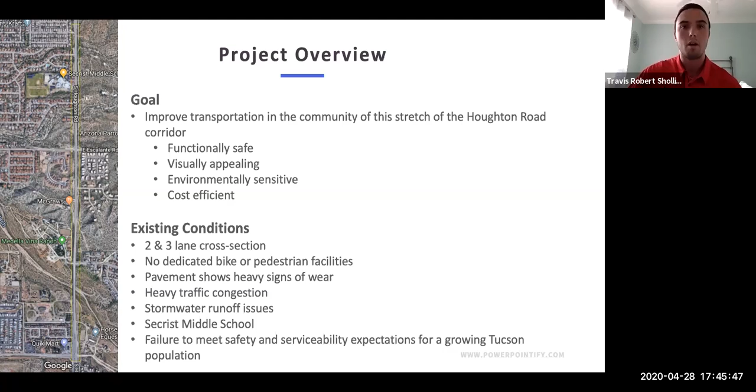So what are we doing about it? Our design team is confident that our design solution checks all your boxes and can be defined by this simple scope of work. We want to expand the 6-lane highway with a center median and paved shoulders. We want to improve the horizontal and vertical geometry, as well as the intersection realignments and right-of-way expansions.

We're going to implement traffic control throughout all phases of construction. We want to provide bicycle and pedestrian facilities, including an ADA accessible pathway. We've designed 2 new bridge structures to accommodate the expansion. We want to add additional drainage components as well as improve upon the existing ones.

And like mentioned earlier, perhaps the greatest concern is improving the safety, access, and student drop-off and parking at Secrist Middle School. All the while, our design is backed by several aspects of value engineering that apply to the components listed below: the retaining walls, sustainability, Envision design, and the bridge design selection, which will be touched upon by the respective disciplines later. Without further ado, I'm going to hand it on over to Sergio, our roadway lead.

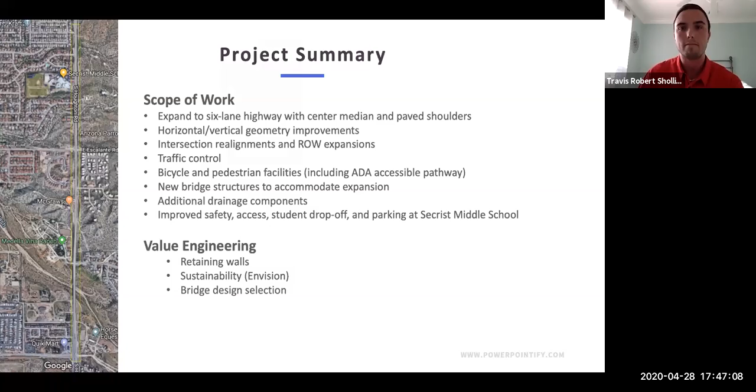Thanks, Travis. As Travis mentioned, there's only 2 to 4 travel lanes, which can get pretty congested during peak hours. And currently there is no sidewalk or bike lane, which makes driving the only method of navigating through Houghton Road safely. So I decided to go with a design from the roadway design manual. I picked this design because it provides 6 travel lanes, as well as a curbed median, sidewalk, and shoulder that can be used as a bike lane.

I also picked this one because it's familiar to the public, because this is a similar design south of the project area, and I felt it would be best to keep everything consistent. Some sections will require retaining walls because some of the end slopes extend past the right-of-way easement, as well as may interfere with the utility easements. Next slide.

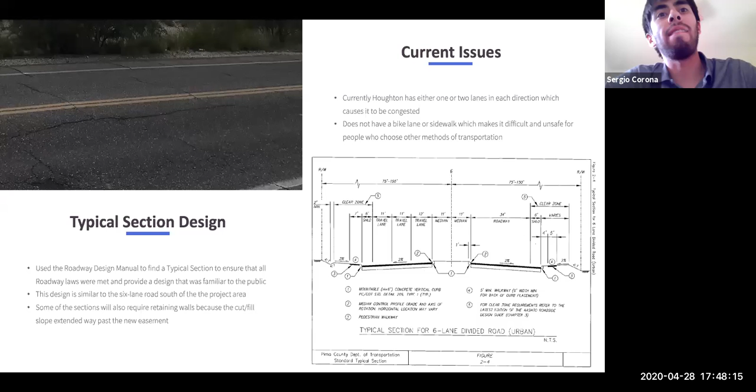Another part of the project was designing the intersection for Escalante, and I decided to follow a similar design as the roadway design manual. Instead, I decided to go with 4 travel lanes because the traffic flow wasn't as intense as the one on Houghton. I decided to also add a left turn lane, making navigating on Houghton Road easier, and there's discussion whether or not to include a right turn lane or have people turn right using the rightmost travel lane. Further study is needed to come up with the final design. Next slide.

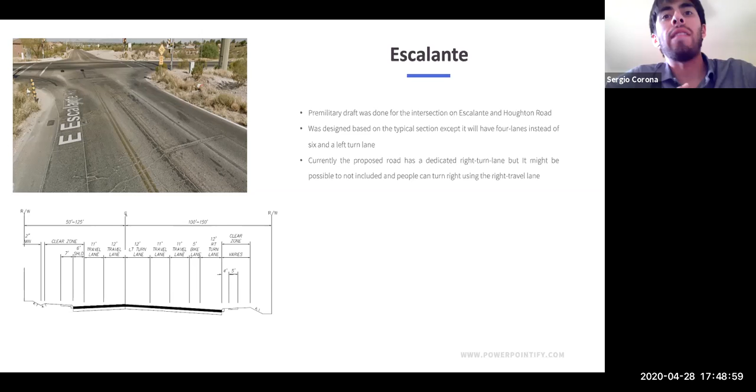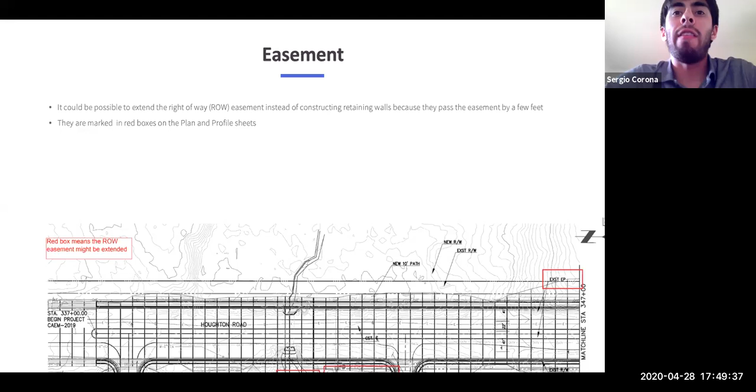There are some sections where it may be easier or financially feasible to just extend the easement by a couple of feet, because some of the end slopes only extend past the easement by a couple feet, so it doesn't seem very economically sound to build retaining walls in these certain sections, and they're marked in red boxes in the plan and profile sheet. And now I'll pass it over to Kristen.

Thank you, Sergio. So to begin, in the traffic portion of the project, we started off with doing a safety analysis. The roadway can be analyzed for safety to determine how to improve the corridor. The existing roadway was analyzed from data that was collected from December of 2004 to December of 2005, so over a period of 1 year. Based on that data, rear end collisions are most common along the corridor, and these collisions were most often not caused due to driving violations or any unsafe driving by the vehicle user.

So out of the 110 collisions that were accumulated within this year, 58% of crashes did not result in any injury. So from this, it can be concluded that a user in a crash is less likely to be injured than not along the existing roadway. So these are just aspects to take into consideration when making safety implementations along the roadway. And there were no fatalities along the roadway either.

So the future roadway safety can also be assessed, and this resulted in a prediction of about 8 crashes per year, where 3 of these may result in injury. An interesting thing about the safety conditions for the future roadway was that single vehicle crashes are actually 3 times more likely than multi-vehicle crashes along the future corridor. And then at the intersection of Escalante Road and Houghton Road, an additional 5 crashes per year can be expected at the intersection specifically, where 3 of these have the ability to cause injury. And moving on, I will discuss the intersection performance.

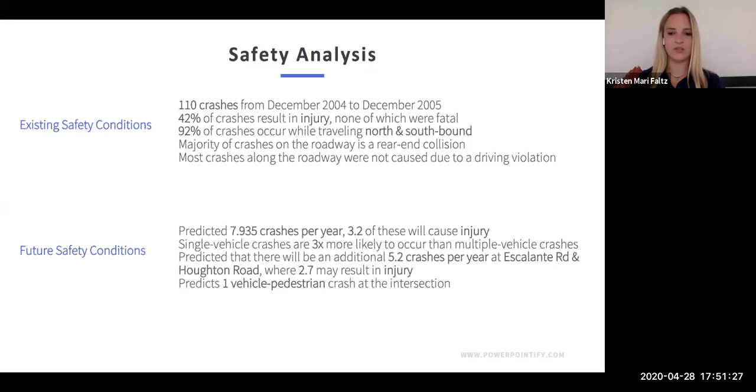So to assess the intersection at Escalante and Houghton Road, the level of service can be used to determine if the roadway is being utilized efficiently for vehicle traffic. This is important in determining if the future roadway will be over or under designed.

And so the existing roadway was operating at a grade A, as you can see in the top figure, along Houghton Road specifically. Although this seems to be good, it actually means that the roadway is being underutilized. And so when comparing this with the future roadway level of service, it may seem as though the level of service worsened during those specific approaches since they decreased the letter grade, but that actually displays that the future roadway is better utilized than the existing corridor.

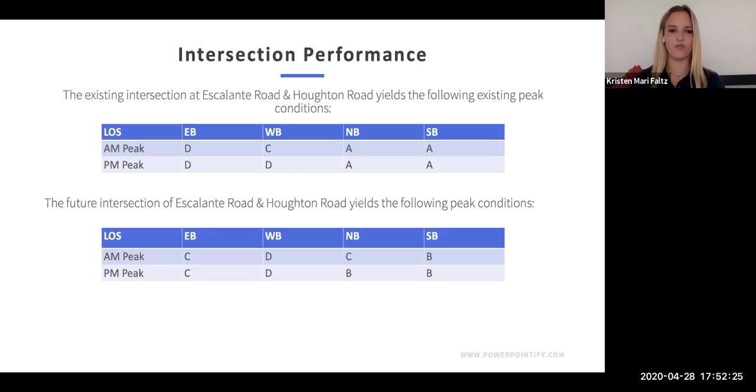So moving on, I will discuss Secrist Middle School flow and parking. So the current parking lot available to the public is 44 spaces with an additional side lot of 25 spaces that serve faculty and staff population. Those can both be seen on the upper image on the slide. Based on the City of Tucson ordinance, 46 spaces are required to serve this school for both public and faculty and staff populations. From the current parking, you can see that it meets more than 46 spaces because you have the sum of the 44 and 25 spaces.

So because of this, it is recommended that no additional parking be built because it will just go underutilized. So the ratio of public parking to faculty and staff parking should just be adjusted to best utilize what's already existing there.

And then if you look down at the bottom figure, that will display where the new drop-off and pickup area for parents will be. This will be moved south of campus, and this location will allow the drop-off area to hold many more cars and also remove the congestion that can be seen in the existing parking lot and even the existing surrounding roadway due to the pickup and drop-off.

And then a Pelican crossing will also be implemented just north of campus. This location was chosen because it will provide pedestrians with a safe crossing option, as well as allow vehicles turning in and from the school to have an opportunity to turn onto Houghton Road without having to deal with the moving traffic that can be seen at these peak times.

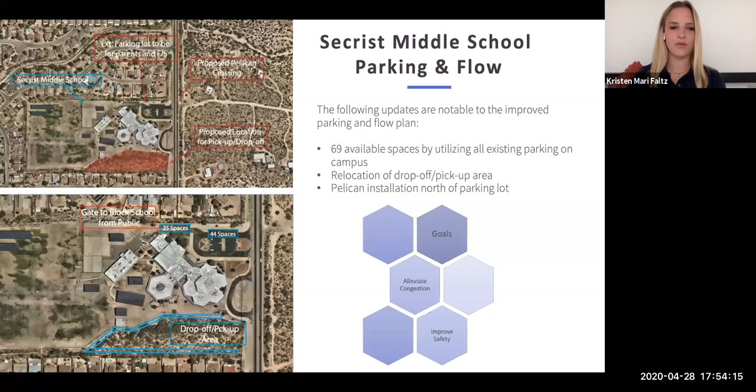So moving on, I will discuss the alternative transportation methods that are implemented throughout the roadway as well. In addition to the recommendations mentioned above, recommendations are also made in regards to alternative methods of transportation. The existing shared use path south of the project will be expanded throughout the entirety of the project bounds. This will provide both pedestrians and bicyclists with a safe option that gives them a sense of safety because they'll be separated from the roadway. The shared use path will also connect with the Pelican and provide safe crossing for the middle school users.

In addition to the shared use path, there will also be bike lanes on either side of the roadway that will be painted green. This will allow bicyclists to travel in either direction while enhancing awareness of vehicles to watch out for bicyclists, since the green paint will draw attention to the bicycle lane more than an unpainted striped bicycle lane. It is also important to note that the alternative enhancements I've already mentioned will also improve safety for vehicle users because they'll be more aware of and separated from these alternate transportation users.

Additionally, bus pullouts will also be implemented within our design. Although there aren't any routes throughout the corridor right now, there will be in the future, so that's an option they have to easily implement. A bus pullout will be implemented at Secrist Middle School, moving southbound. And the nice thing is this bus pullout will also act as additional school bus pickup and drop-off space. And then there will be an additional bus pullout north of Houghton and Escalante.

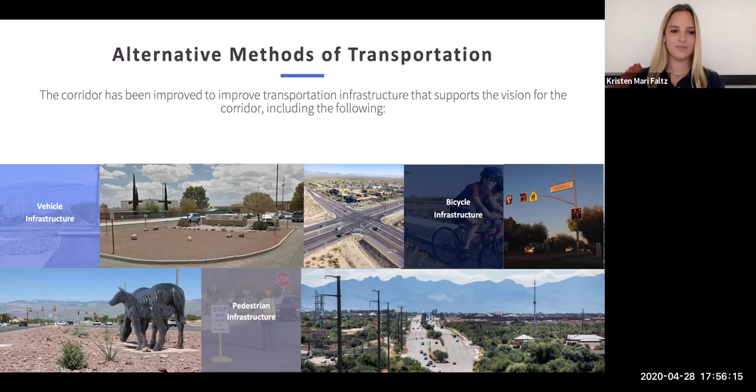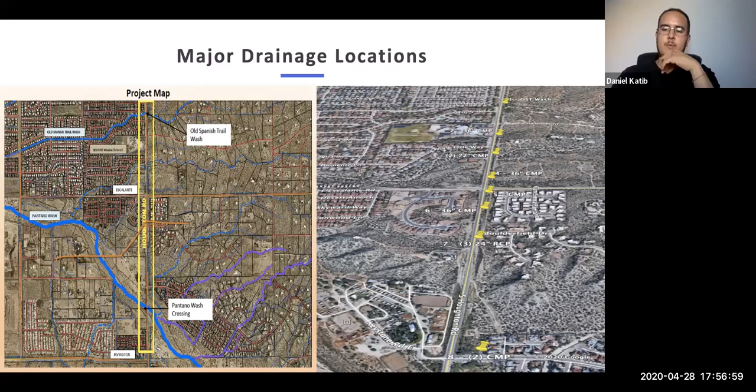So for the Pantano Bridge, I obtained the results by running the existing model given to me in the HEC-RAS software. This showed me that the freeboard clearance did not meet the ADOT 3-foot requirement. With this information, we decided to raise a new bridge in order to meet ADOT requirements.

In this slide, the table shows the existing conditions for each culvert crossing shown in the first slide. The next one shows the proposed changes to these culverts due to not being effective, with this analysis done by running HY8. So by running it in HY8, I determined that 3 out of 7 culverts and 1 storm drain needed to be changed.

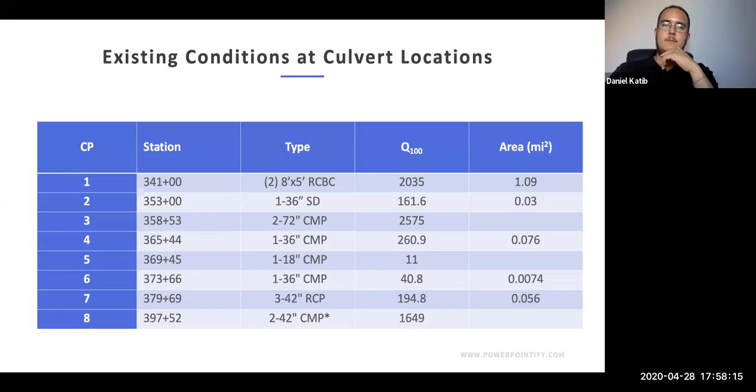This being said, now we have Jason with Geotech. Thank you, Daniel.

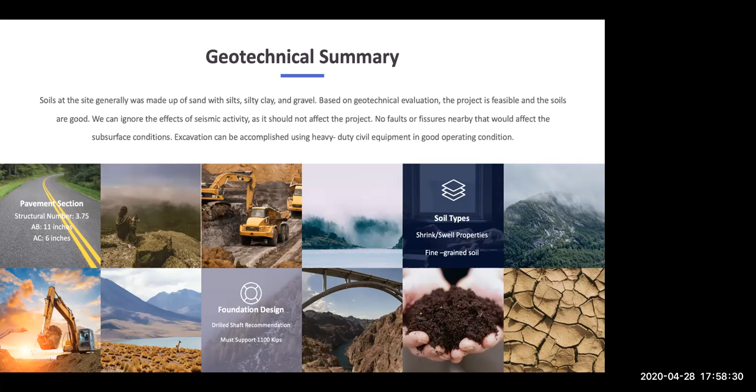So to give you guys a geotechnical summary, soils at the site were generally made up of sand with silts, silty clay, and gravel. Based on geotechnical evaluation, this project is feasible and the soils are good. Given that we are in Tucson and in the project area, we can ignore the effects of seismic activity. Faults and fissures should not affect the project, and excavation can be accomplished using heavy duty civil equipment in good operating condition.

To give you guys some recommendations, for the pavement section we recommend aggregate base of 11 inches and asphaltic concrete of 6 inches. For foundation design, we recommend a drilled shaft that must support 1,100 kips. More detail can be found in the full report.

And something to keep in mind for the longevity of the project is the soil types. There are fine grained soils found throughout the corridor, and these may have some shrink and swell properties that may affect the project and the structures over time. So I will now pass it to Tariq, who will talk to you about the structures.

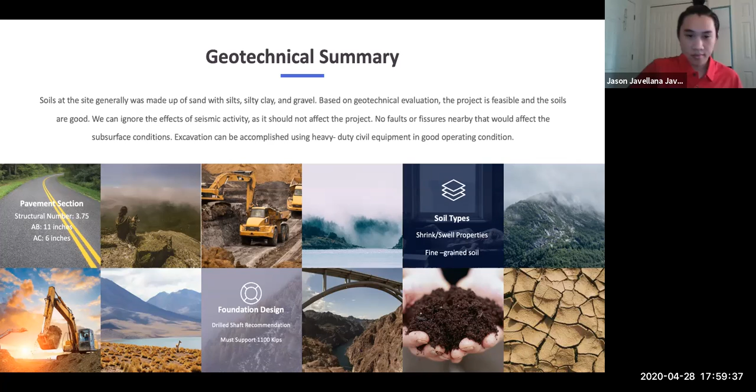Thank you, Jason. So as you know, the bridge makes up a big part of this project, at least in terms of cost. And as you already know, the existing bridge does not accommodate the expansion of the corridor as it does not have enough capacity for traffic flow.

As such, we propose a new bridge configuration that is composed of two new bridges, as shown in the plan view. One new bridge will be immediately to the east of the existing bridge, and another bridge will be on top of the existing one, to be built after the existing bridge is demolished. This design allows for the continuous flow of traffic throughout the period of construction, and the details of how that works will be covered by the construction team.

For our bridge selection, we came up with 3 alternatives highlighting different superstructure configurations, varying in number of spans, in girders, and in deck thickness. The first alternative utilizes AASHTO Type 2 girders spaced at 10 feet to support a 9-inch deck, and that sits on a whopping 7-span structure.

The second alternative utilizes AASHTO Bulb-T girders spaced at 10 feet to support an 8.5-inch deck, which sits on a 4-span bridge, matching the existing bridge in terms of spans. Alternative 3 utilizes AASHTO Type 5 girders spaced at 8 feet to support an 8-inch deck, sitting on a minimal 3-span structure.

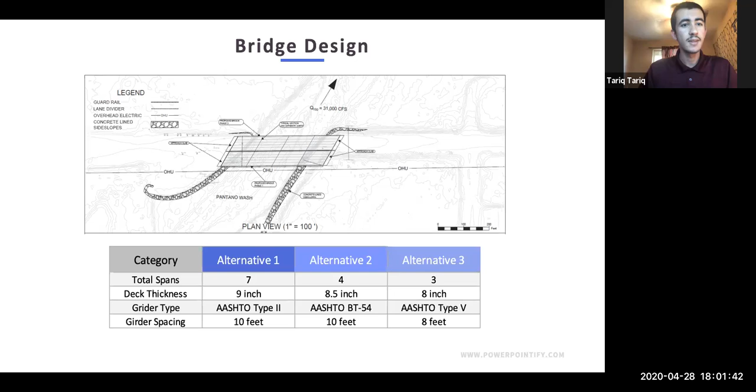So weighing the advantages and disadvantages of these multiple alternatives, we decided that alternative 2 is the best fit option for this project, as it nicely balances cost, constructability, and environmental impact. And next will be Stefan covering retaining walls.

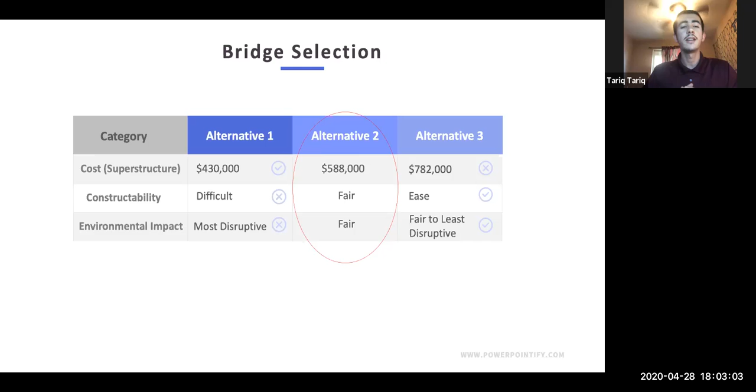We're using a concrete cantilever retaining system, as well as a mechanically stabilized earth structure. For walls up to 15 feet, we're using the concrete cantilever system, and for walls greater than 15 feet, we are using mechanically stabilized earth structures, or MSE walls. I want to point out 2 walls that we will build.

The one at Station 381 is utilizing both. One for the concrete cantilever, it's up to 15 feet, and then above that, for the remaining 10 feet, we're using the MSE wall. This is to provide fewer foundation structural systems in it. And then for Station 386, we're just using the MSE wall due to the fact that, for constructability, it's much easier just to use one wall in this spot.

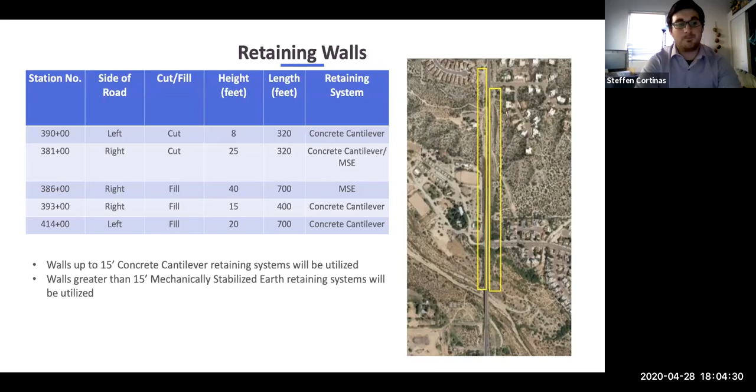Now I'd like to turn it over to Cory for the environmental aspects of this project. Thank you, Steffen. So the environmental group was put in charge of creating the most sustainable road possible, and this was looked at in the areas of environmental consideration, cost, and most importantly, safety. Overall, the Envision software is what lets us quantify these more subjective sustainability goals. So the area of Houghton Road is found to be in a very vibrant neighborhood community.

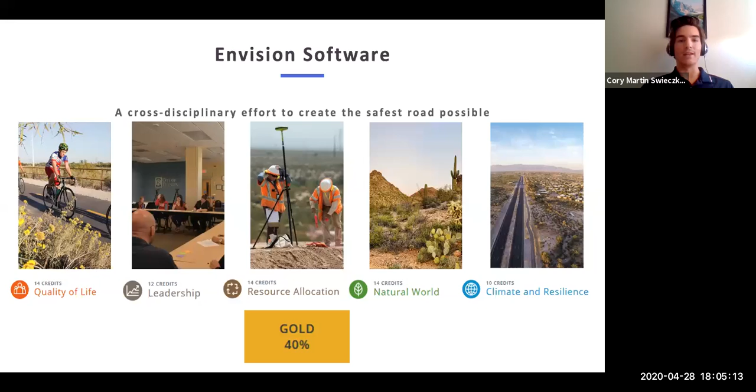Additionally, every aspect of the community was utilized through allowing stakeholders and the public to come give concerns and be informed throughout this process. This allows us to create a shared use path to enhance these features for the public. And finally, we focused on maintaining the characteristics that make Houghton Road great. This includes the ecological sites found, especially around Pantano Wash. This was kept intact with the help of a stormwater pollution prevention plan and working with the construction team to create the safest phasing plan possible. And to outline this phasing plan and a little more of what goes into the construction process, I'll hand it over to Ethan and the rest of the construction team. Thank you.

So with the communication and collaboration of our design team, they were able to have minimal effect on Tucson Electric Power's utility lines. And we'll be working with the City of Tucson for ample notice of any community impacts. We'll be working with Tucson Unified School District for safety guidelines throughout the construction process, and the services Banner Health provides. Moving into the construction phases, there will be 3 phases as part of this project. Phase 1 and 2 are going to be dealing with the roadway. We're going to begin with phase 1 on the west side heading north of Houghton Road.

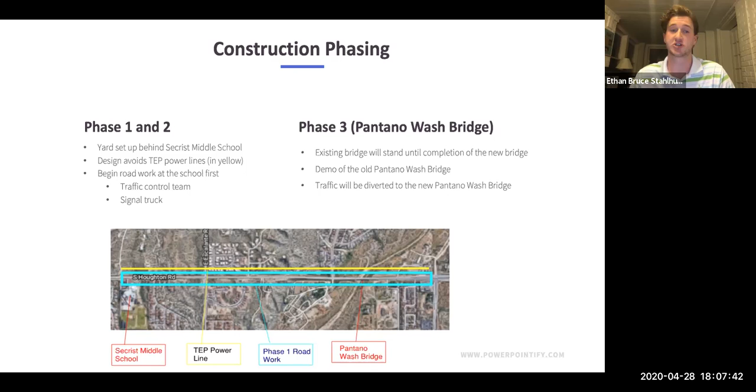The last key aspect in the construction phasing will be the Escalante intersection, which will be shown in the next slide. Just like phase 1 and 2, we think it's most beneficial to demo the west side of Houghton Road at this intersection and then move into the east side. And with the expansion of the road, we think it's most beneficial to improve this.

We will also improve the traffic and lighting signals at this intersection, and we will provide pedestrian barricades, represented in the detail in orange, so bicyclists, students, or anyone that needs to get through the intersection has safe travel. We will also have new clear visual travel lanes so drivers can understand which are the correct left, straight, or right turn lanes throughout this construction process to minimize accidents. And we'll have traffic officers and traffic control throughout this entire process to aid in safety and traffic flow. And now Jesus can go over the preliminary estimate.

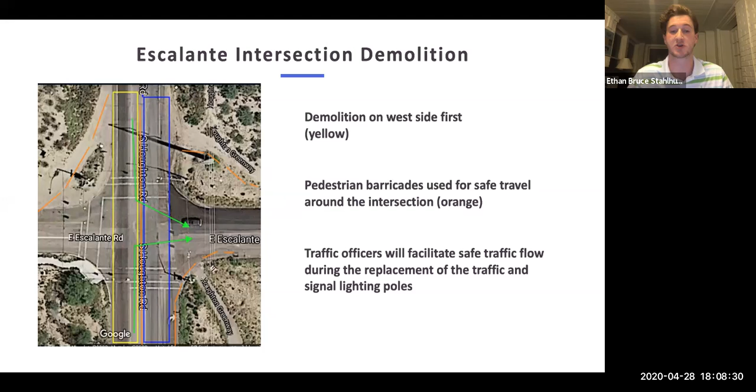My name is Jesus Ruiz, and I'll be talking about cost estimate considerations and also about the cost estimate breakdown. First, we have to acknowledge that we are using a CMAR procurement process, which stands for Construction Manager at Risk. And that allows us to work closely with the design team early to talk about constructability, as well as to address their needs such as environmental work and traffic flow.

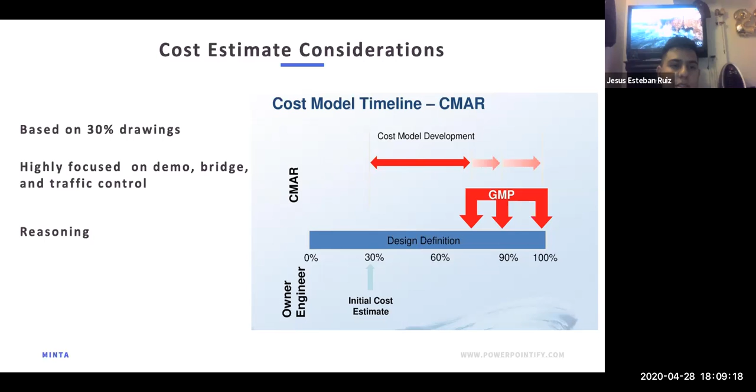Our estimate is based on 30% drawings, and we are using a square foot method as we do not yet have the full details for the drawings. Yet we know that we are not far off from our final value, and we will use this as a base for when we get more complete drawings. We mostly focused on demo, bridge work, and traffic control in this estimate.

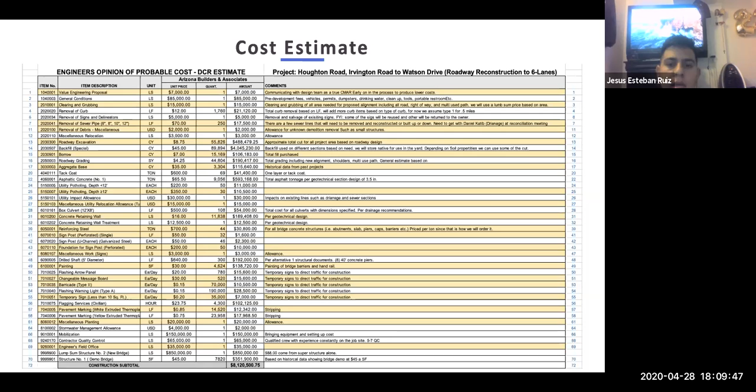Our construction subtotal is $8 million, but our total project cost is $15 million, considering costs outside of just the construction items, such as contingencies, which we have estimated at 40% of the total construction. We will lower this price once we get better detailed drawings, and then we will actually have a better estimate once we're at 60% and then at 90% and then at completion. So I will now return the stage to Travis.

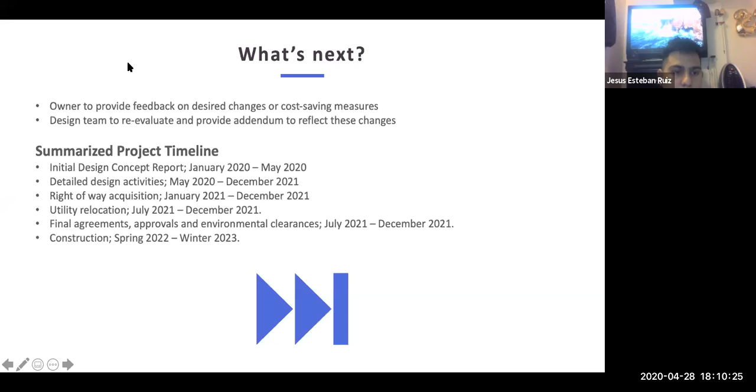Thank you, Jesus. So where are we going from here? What's our plan moving forward? We believe that from day one, this is a team effort. So we would like the owner to provide feedback on any desired or anticipated changes that may result in cost-saving measures as soon as possible. This will give us ample time for the design team to reevaluate and provide addendum to reflect these changes, as well as update our schedule and our cost estimate.

So we just completed our initial design concept report this month, May 2020. So we are on track to start tightening up our detailed design activities for the next year and a half. And if all goes well in between then, we hope to start our year and a half construction duration in the spring of 2022.

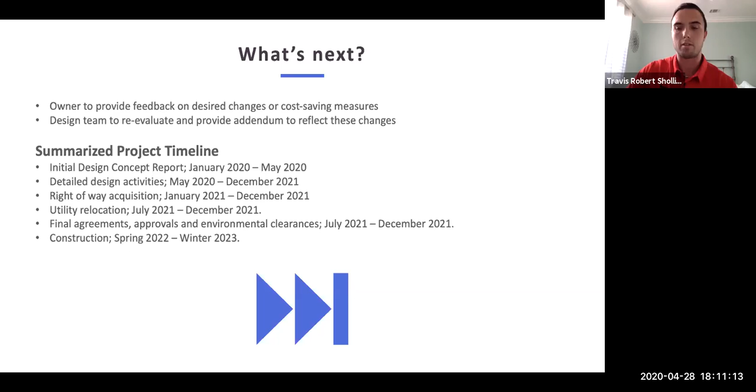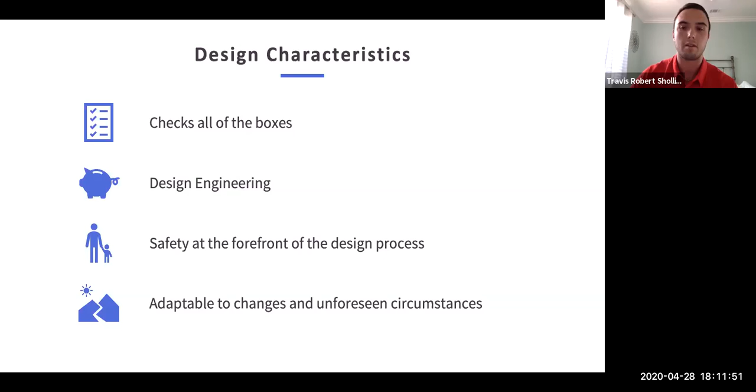And before we conclude, I just wanted to emphasize a few characteristics of our design that I feel are worth noting. We're confident that this design checks all the boxes and needs for what you, the owner, are looking for out of this project. This next line on it is a typo. It's supposed to say value engineering, but we're committed to implementing value engineering wherever possible and do welcome your feedback in that as well. Safety has and always will be at the forefront of the design process, and we feel that our design and our capabilities are adaptable to changes and unforeseen circumstances. With that being said, we'd like to open the floor for open questions.

This is Doug. I'll start if that's all right. You identified the project as a CMAR. How did you settle on CMAR over the other alternative delivery methods? Hi. So CMAR offers more time at the beginning for us to talk with the design team. So we think it's a better choice for this project, since we can start telling them if their ideas are going to actually work out in the field, instead of just getting drawings as in a typical design-bid-build project where you just get the complete sheets and then you have to go from there. Does that make sense to you, Doug?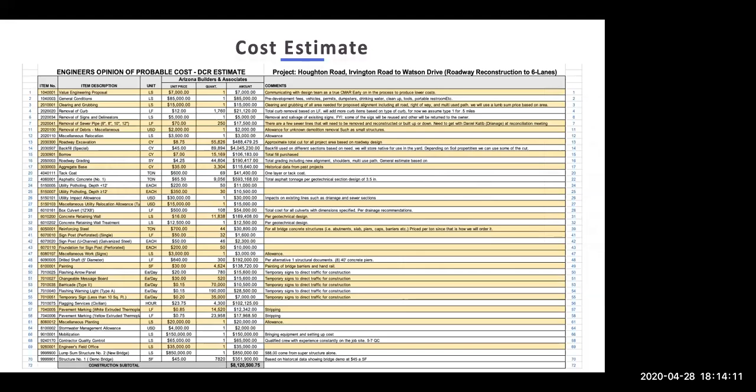Hi, this is Anna. I also had a question on the estimate. So I noticed that the total cost is almost double the construction cost. Is that because of the high contingency or right-of-way cost, or what is it? Yeah, so our total project cost is almost double, as you can see, because in our estimate, we put contingencies that we might need to account for in the future as 40% of the construction subtotal. So once we get more complete drawings and more details on how we're going to approach construction, that price will lower, because right now there's too many unknowns, so we're just factoring that in as a what-if case, you know? Yes, thank you.

Can you tell me about the demolition of the existing bridge? You're going to put the foundations in the same locations as the existing foundations, or are you shifting them off with the spans to a different spot? How is that working with the foundation of the existing bridge and your new foundations?

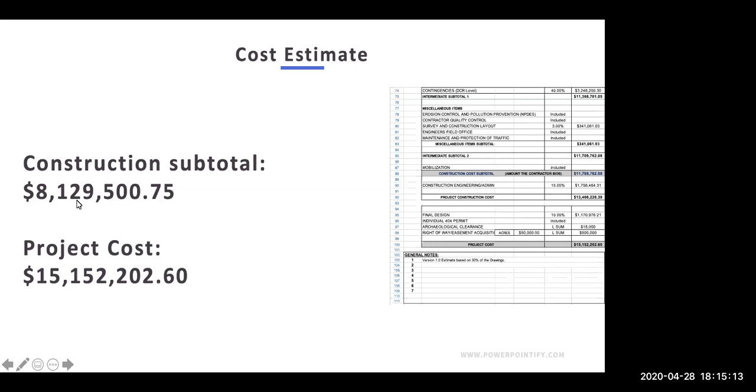We will be putting the new bridge to the east side of the existing bridge, and this will just allow for the traffic flow throughout the whole process to be able to use the existing bridge. And then at the appropriate time, the demo will not affect the substructure of the new bridge, but this will just allow for steady traffic flow throughout the whole project and no congestion due to not having a bridge.

So the bridge is going to get completely shifted to one side, or I missed that completely then. So yeah, it will be diverted. Okay, all right. So it's a realignment of the roadway then as well to account for that? Yes. Okay. Sergio, can you confirm? Yeah, we will adjust the alignment once the final design of the second bridge is finalized or further along in development. Good, thanks.

So Kevin, let me just clarify. When you look at it right now and the right-of-way that's there, everything's off on the east side of the right-of-way except for the bridge, which is on the west side of the right-of-way. So right now, when you approach the bridge from either direction, you have to veer to the west and then veer back. But now when they widen, everything's going to widen to the west, except the bridge has to widen east. So, odd situation unless you really look at the plans. Maybe clarify it a little bit. Okay. Thanks. Yep.

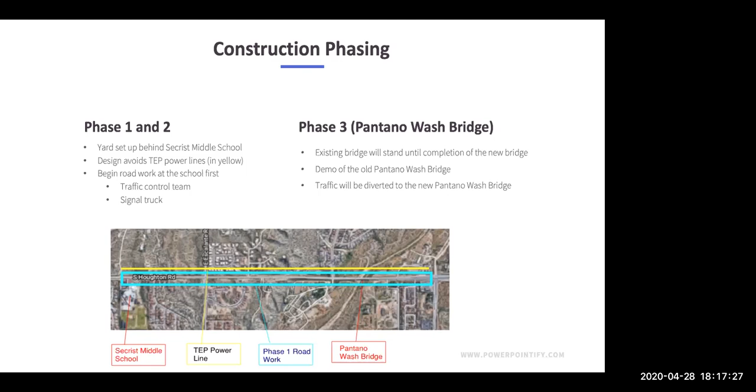Hey, Frank, anything? No, Doug beat me to the Seymour question. I was curious to see why they went that route. So okay. I think I'm good. Good job, guys. All right. There's nothing for anybody else. Thank you all. You did a great job and moved it along well, and good slides and everything. Nicely done. You guys can go ahead and leave. If the judges want to hang out, we can talk for a couple minutes before we switch to the next one. Thank you, guys. Thank you, judges. Thanks, guys.

Okay, well, it looks like Doug left. But all right. Were there any questions anybody wanted to ask before? I should have hung out in the last meeting afterwards, and I forgot. I went away too quickly. So, no, this team did great. Yeah, they did a nice job. Yep.

Okay, any questions? Don't forget, please, you're going to score each discipline, and then there's a subtotal there, and then there's an overall team effectiveness score, which is just how the team merged together and transitioned and whatnot. So the basic scores add up to 90%, and then there's 10% for the overall team effectiveness to give a total of 100 points. So that's the only reminder. You guys can leave or stay in there and do your scoring, and we start the next one in about 11 minutes.